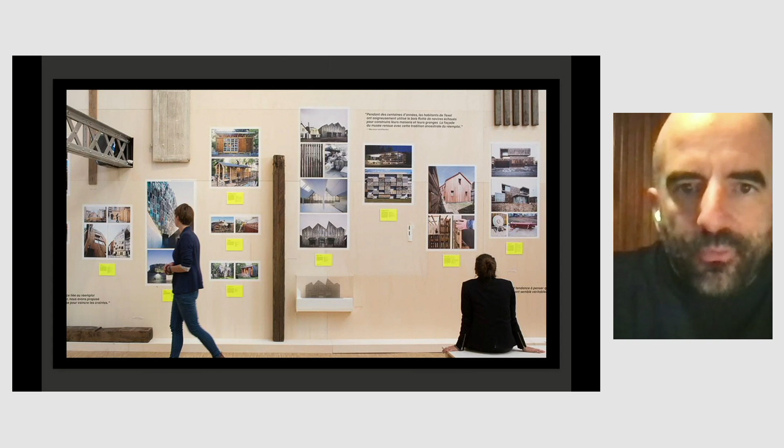In 2014, we did a big exhibition in Paris presenting and showing the reuse of materials in architecture. We collected hundreds of projects from all around the world showing new ways of building with existing stuff.

Some months later, the City Hall of Paris asked us to redesign a small office. That was the starting point. It was a very old place with painted walls, and they asked us to make a recycling design, to use reuse material to change the design of the space.

So we proposed to work with the trash of the city of Paris. We went to the place where people throw away chairs, for example, and all the wood parts, and we worked with the City Hall team to transform these elements.

A few months later, there was the COP21 in Paris in 2015. The city of Paris asked us to make a small building, saying: okay, you made an interior design, but can you build something with circular economy?

So we worked with these doors and made the Circular Pavilion, which is circular not in its shape - you see it's just an angular shape - but it's circular because the facade of the building is made with wood doors that we took from a housing building that was about to be demolished.

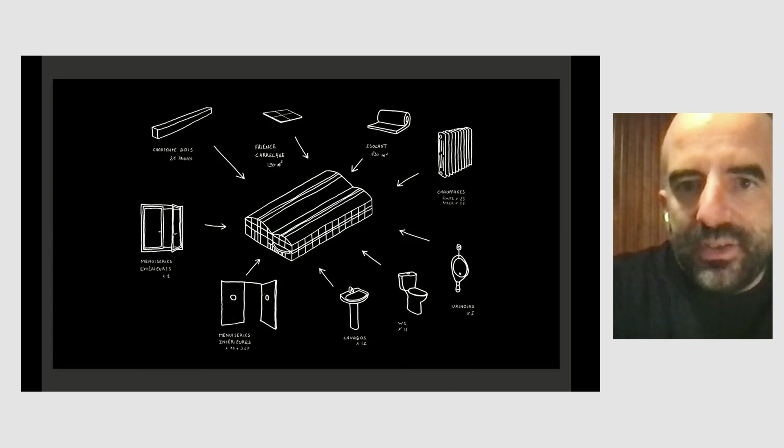So we held a lot of meetings, trying to understand the situation, understand the building, and we also collected many elements to make this project: windows, doors, lavatory fixtures, heating systems, insulation, even pieces of wood.

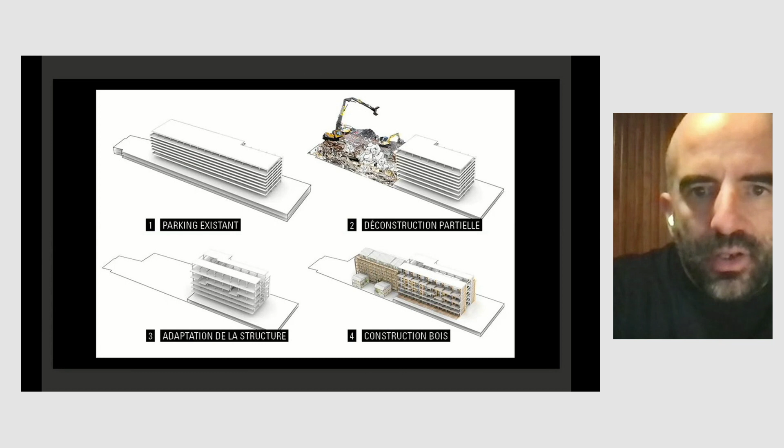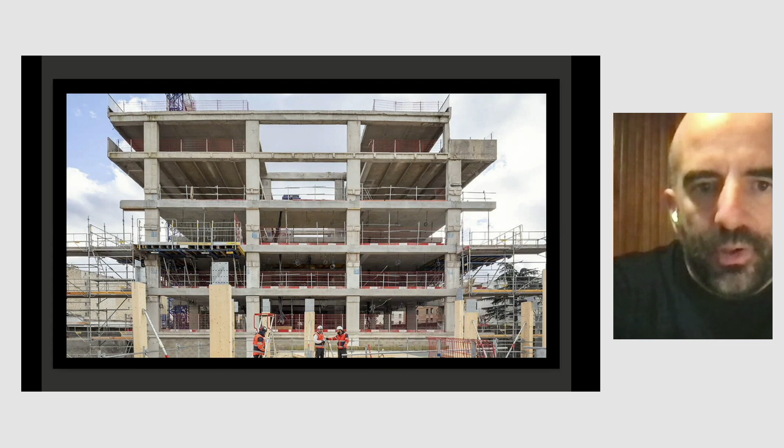And we decided to keep it, and we decided to make housing inside the car park. So we keep the structure, we keep the concrete, and this is a picture at the time when we keep the concrete - we just open the middle to have light in the middle of the building, and from this concrete structure we did housing. It's very specific housing because all the apartments have big balconies, because we didn't design the building, we just transformed it.

So also that is very important. When you start from an existing building, you have a lot of elements that make the design also with you, and you are not just on the white page designing something with no relationship with the existing and with the materiality. And the last project, it's very small.

I want to finish with this one. It's more an art installation, and it's in the southwest of France. And we did small tents of stones in a very natural park. And we wanted to make like a camping tent, but in stone. And we worked with people that are working with these stones.

There is no concrete, no cement. It's just stone one on the other. And we did these two small tents. And this material is very simple because maybe in 1,000 years you can take these stones and make something else. So for us, it's a good way to think about the future of architecture.

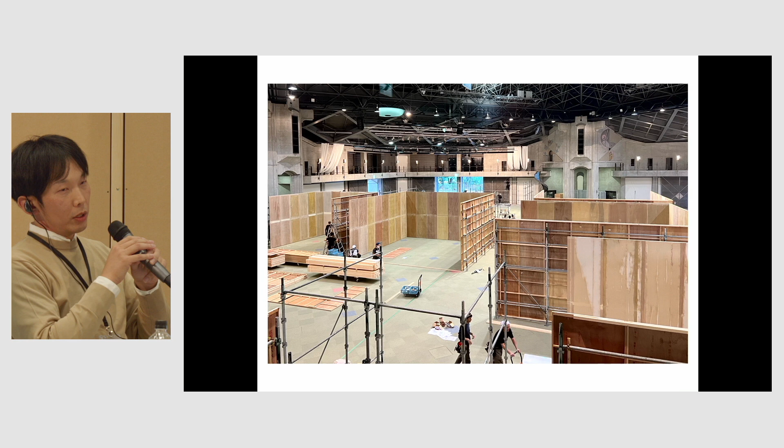As you can see inside of the booth, this is the panel that you can reuse. That part will be in white color, but other than that, it's not painted, it's not covered. Outside, as a construct, we need to build a wall, and we also used material for scaffolding in a construction site. By using this, the people coming to visit go through these areas and visit different booths.

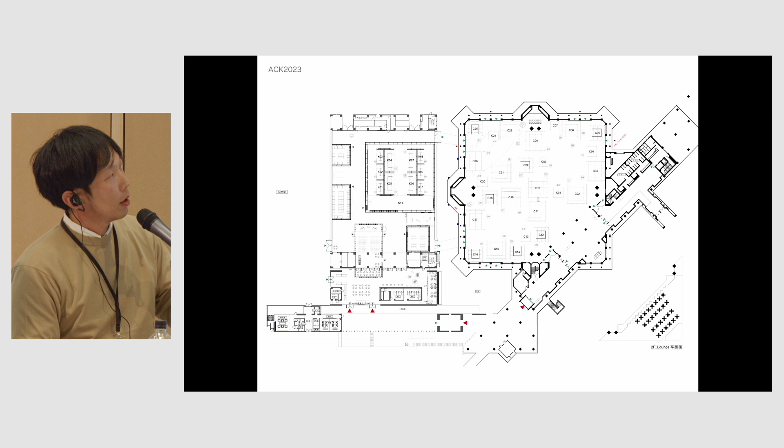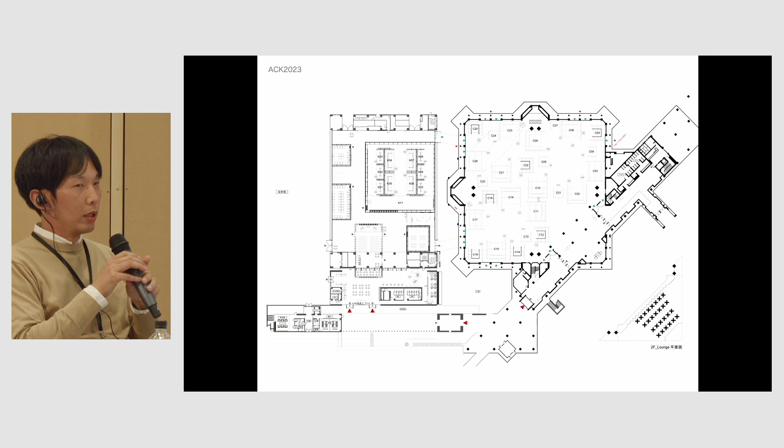On the right side, we have a collaboration booth. There are 3 open spaces, and around that, each gallery is positioned. This hall is called New Hall - this is where we are. Outside is a white wall, and actually inside they have wood exposed. So even though you go to different locations, there's some connection in different scale, trying to create a sense of cohesiveness.

I just explained how physical elements are brought together and how they can circulate. The next project I want to explain is a project in Yashima in Takamatsu City called Yashimaru. Yashimaru is like an observation tower.

This is located inside the national park, but the Yashima location itself is also registered as a natural monument, meaning you are not allowed to build anything new or from scratch. But in this case, in this project, they made an exception and allowed us to build something new.

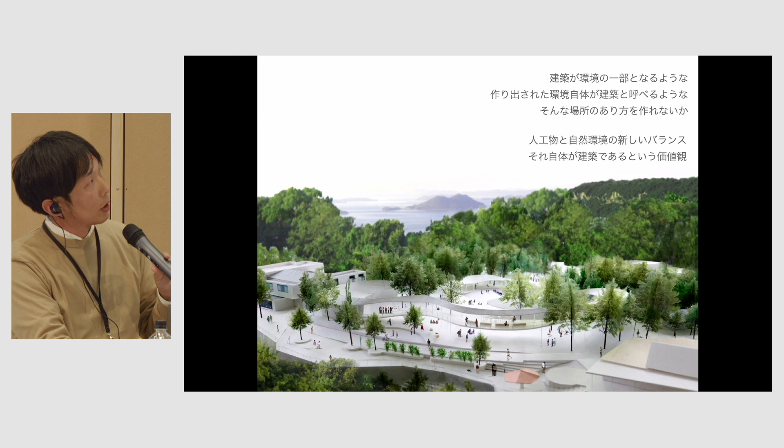I wanted to make something that looked like part of the natural geographic feature. By having this integration, I wanted to propose a new way of architecture and construction. So as you can see, the building becomes part of the nature or environment.

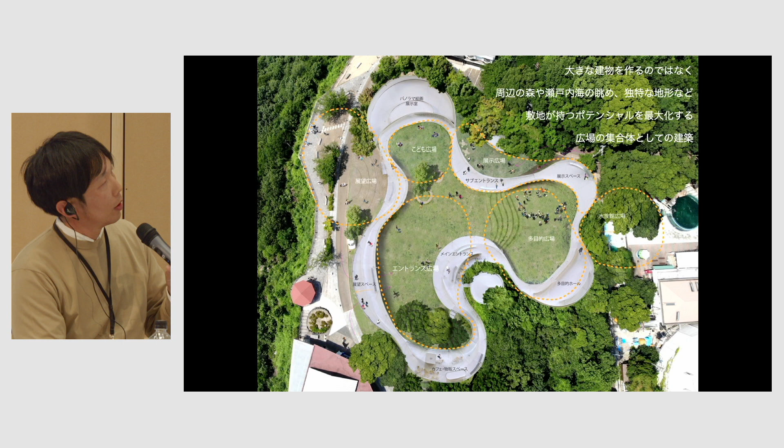The whole environment can be considered as an architecture. So how to integrate with the natural environment or the geographic features? There are 6 open fields, and there is a wavy form of the construct, and they connect those 6 open spaces together.

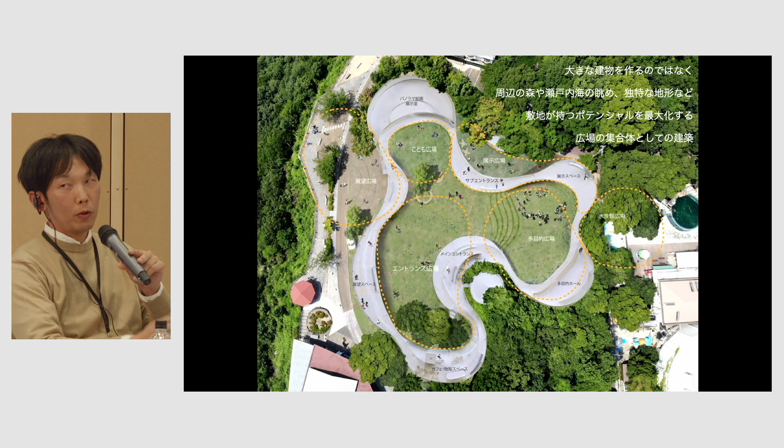The white part you see here is the construction, but rather than looking at it as a construction element, I wanted to integrate that with the shape of the natural form of this area. I wanted to have a shape where the water is flowing naturally in this geographic area.

So people can come in from different places, and in some places they have a high elevation with a good view over the ocean. There are also some small spaces where people can gather. This is a picture of a small path, and the path is connected to this space.

I'm designing all those spaces to make a good fit to the natural environment. The shape of those buildings may look very unique and distinct, but if you actually go to the site, you can't really see those buildings as distinctive.

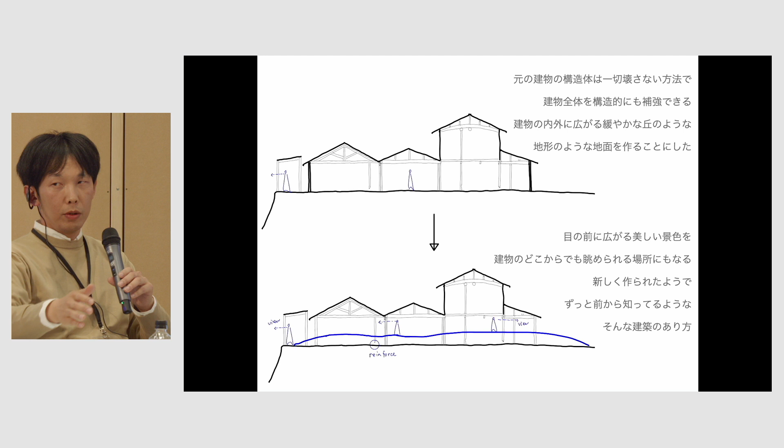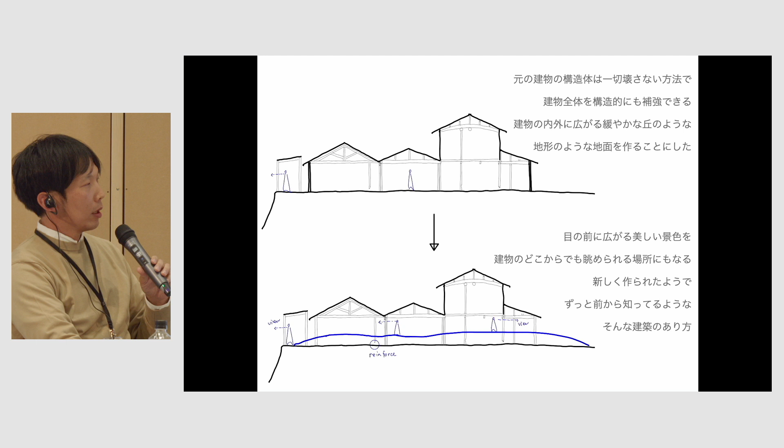I thought about giving a terrain to the space. This applies to the Yashima building as well. I wanted to incorporate the building into the terrain while giving appropriate support to the structure.

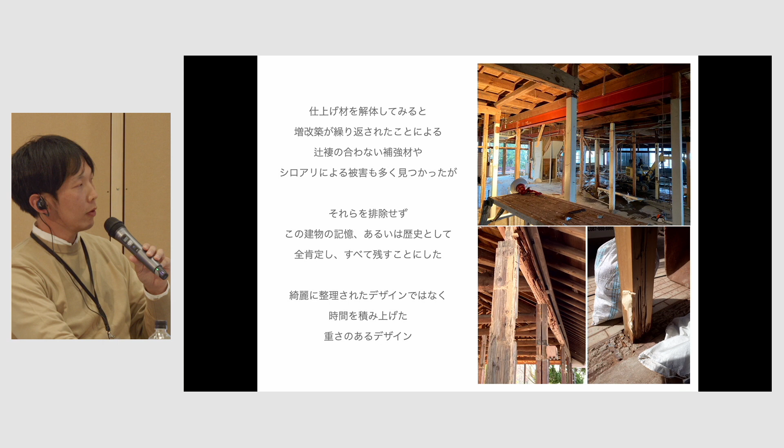I designed this building. This is a picture demolishing it, but we kept the structure itself and got rid of the walls while keeping the structure. We found many damages, some from termites, but we decided to keep that damaged structure to express the space.

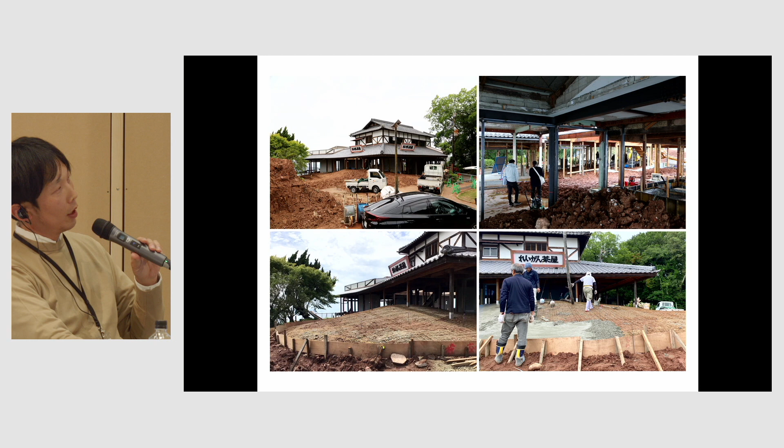We used that soil to make a hill within the building, and then put concrete over it. This is how we designed the building, creating a hill within the building. This is how we came up with the building and also a hill.

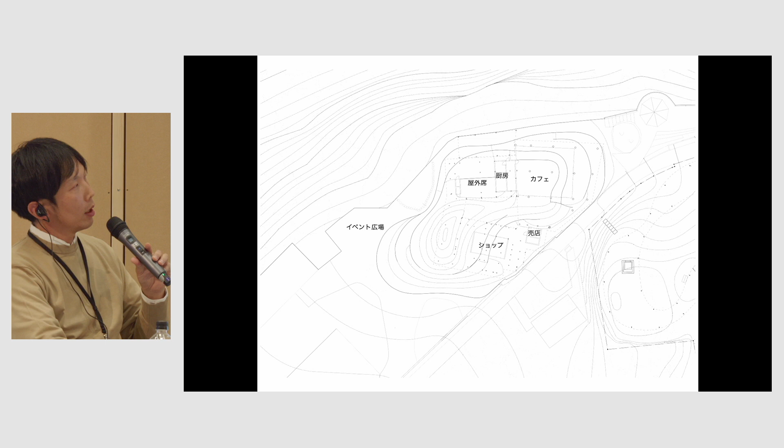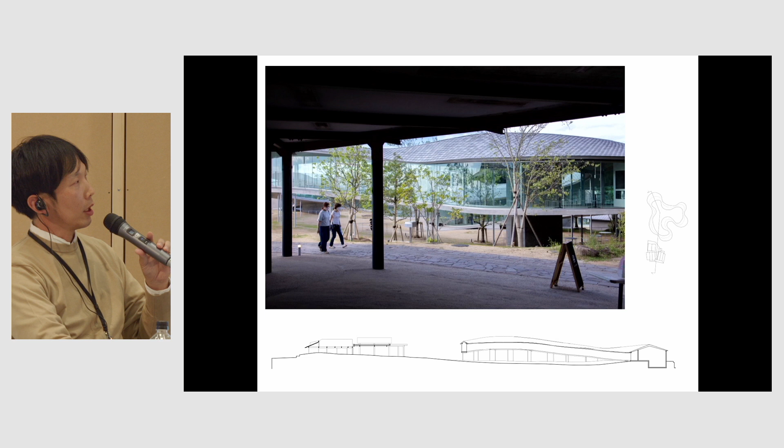Then we created shops, cafes, and stalls. This is how it looks, the connection between the existing building and also the new building. I wanted to create a connection, so we had a yard in between those two buildings. This is the outside view.

We added a hill to an existing building, and that created new spaces to the building, and we utilized those spaces, which is appropriate to the purpose.

And at the lower right, there is a light. This was kept in a warehouse, and we reused that light in this building.

This is my last slide. This is a pavilion we have designed for the 2025 Expo, by film director Kawase Naomi. She asked me to design a building to store memories.

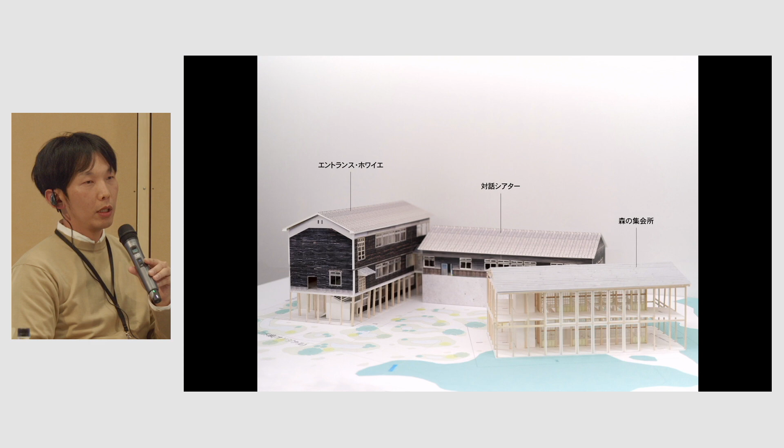This is an abandoned primary school, and we rebuilt that primary school in this area. We are designing a theater, entrance, and also a gathering space using the material from those abandoned elementary schools.

We got those abandoned schools from Totsukawamura village in Nara prefecture to store memories of the schools. So this is the process of rebuilding new schools using abandoned schools.

It was a flat building, but we put them on top of each other to make it a three-storied building. This is a flat abandoned building we made into a theater, but we needed height, so we lifted the abandoned building to make it higher.

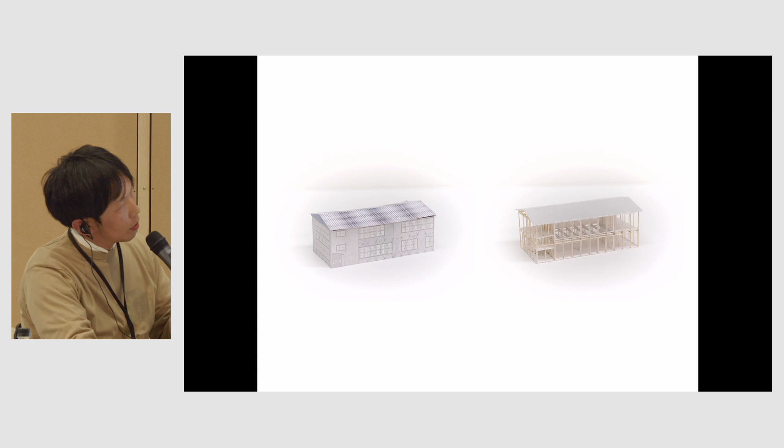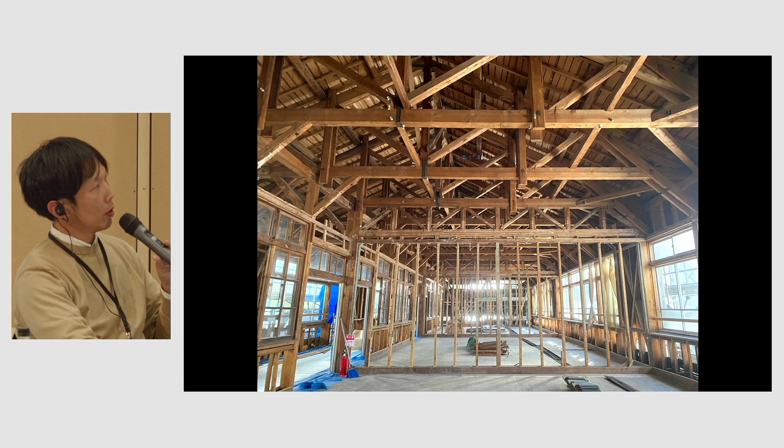And this is another abandoned school in Totsukawamura village. We brought the structure of this abandoned building to create a gathering space.

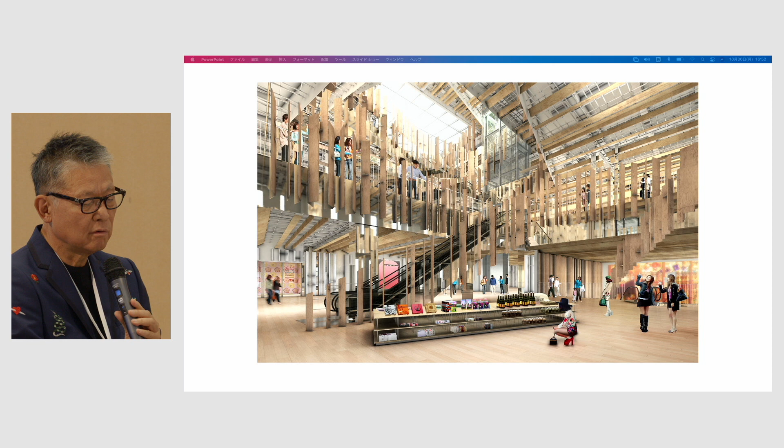Therefore, I combined the library project and museum projects in that city. I came up with this idea of a compact city within the compact city to disseminate information or disseminate ideas. This is the project that I did together with Kengo Kuma, and this is the picture from the completed building.

I think this is the biggest glass museum in the world. Director Mr. Tsuchida is here with us, and we'll have an event next month. You can see everything from inside, and there are many free spaces inside this museum. We can do a lot of activities for the citizens—that's how we completed the idea of compact city within the compact city.

We also have a lot of books, bookshelves, in this museum—we can inspire people. We have free spaces, and we wanted to create a garden of glasses.

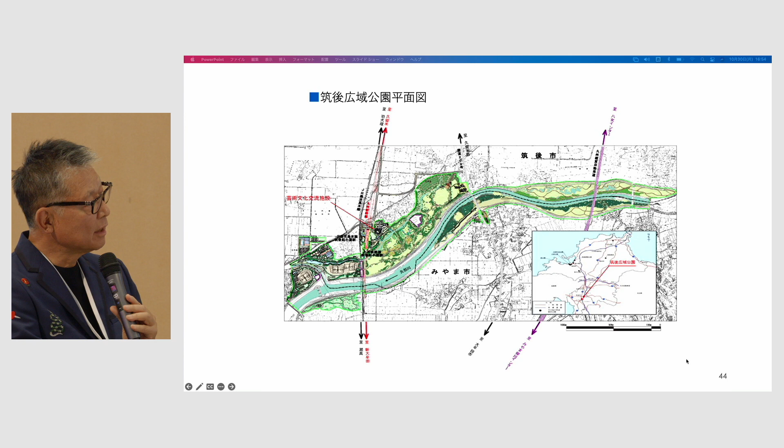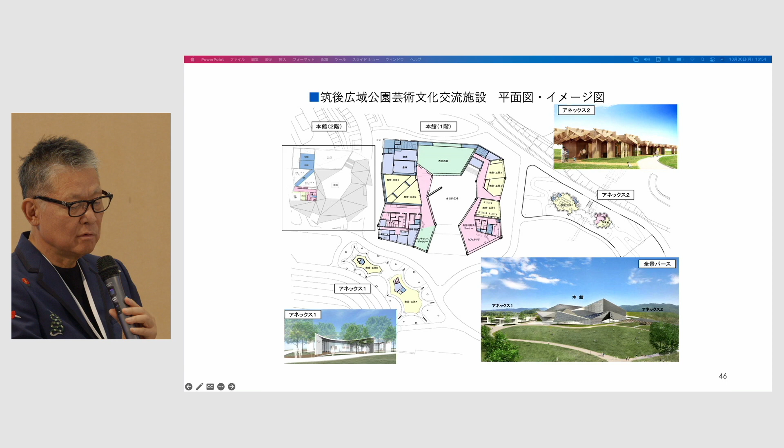This is the area which had a lot of cultural exchange with overseas countries, and this is an area which had been washed away by flood so many times. But each time they are flooded away, they are regenerated. And this is the building, the main building.

I asked three architects to design three different buildings—those are all cultural buildings. This one is designed by Suemitsu, and this one by Fujiwara from Yokohama National University. Those three different things are coexisting with each other, and artists can select the building they want, where they want to exhibit their pieces. I only have five minutes left.

This was not designed to have a Starbucks. We just wanted to create a space, and we thought creating a void space makes the biggest contribution to the local people. But we wanted to serve teas, so we wanted to create a cafe. We asked Kuma Kengo to create the cafe space, and after designing it, we asked Starbucks to open there. If you get rid of those wooden pieces, you can have a void space again.